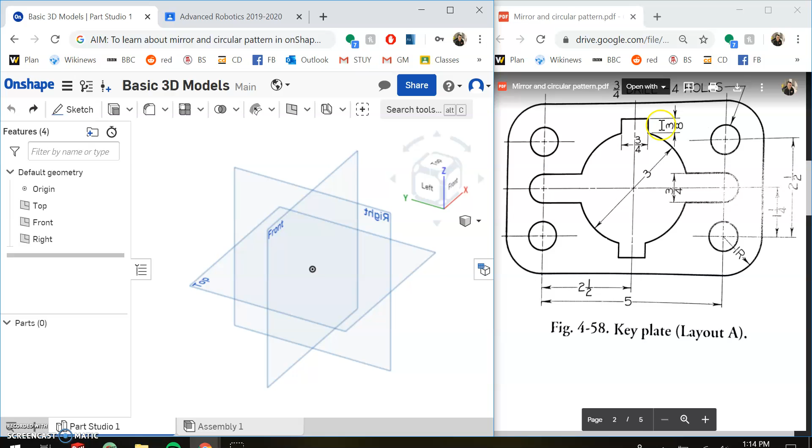Today we're going to go through, I have 2 that I'm going to model for you, and then 3 that I'm going to have you guys do. I want you to go along with me as I'm doing the models and complete those as well.

So let's start with this circular one here. I'm going to start a sketch on the top view. Snap to the top view, and I'm just going to draw 3 circles: my inner circle, my outer circle, and the hole. You might notice that the proportions of these things are totally off.

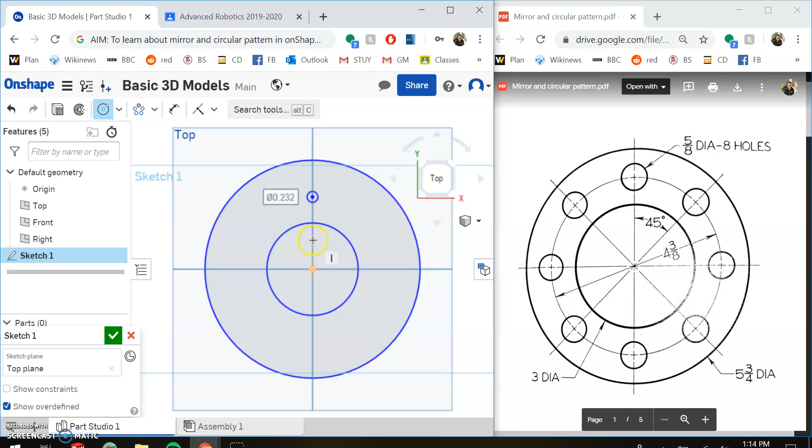This is something I almost always do because I want to make sure I never get confused and accidentally leave an incorrect dimension. So if I drew this hole too close to the correct size, I might just leave it because I didn't realize that it was wrong.

Now that I've drawn these 3, I'm going to dimension this inner one to be 3 inches in diameter. I'm going to dimension the outer one to be 5 3/4 in diameter. Now that I have my inner and outer ones, I can work on this hole here.

I'm not going to dimension this one just yet, even though I normally would, because I want to show you guys something. So I'm going to go to circular pattern, which is up here in my ribbon. If you ever can't find something in your ribbon, you can just type it into this search bar here, or you can hit Alt-C for search, and then type in circular pattern.

You get a preview on the side of kind of what this does. It replicates something in a circular pattern about some center, and then it walks you through the steps of using it. You select the tool, you select the entities to pattern, you specify the number of instances, and so on and so forth.

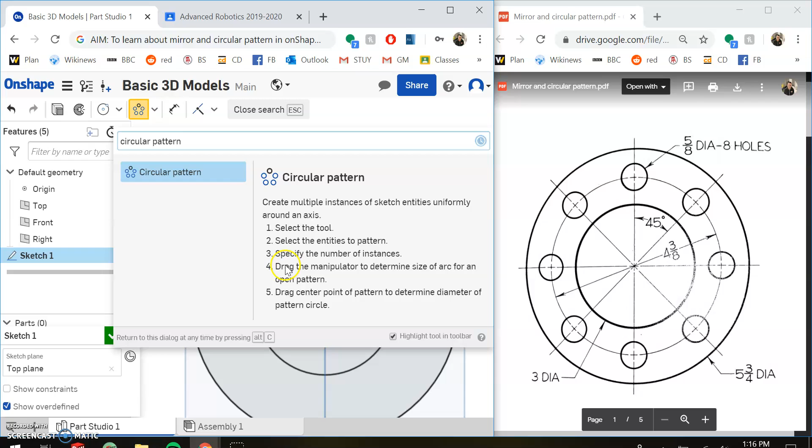So we're going to select circular pattern, we're going to select the circle, and it's going to automatically give us 3. We want 8, so we're going to hit 8, hit enter, and see what that does for us. You can also change the direction if you don't have as many. You can change the angle here, but it looks good to me.

So I'm just going to click again to end that. And then I need to set the dimension of these. The dimension right now is very small. I need it to be 5/8 in diameter.

So I'm going to select that one circle. I'm going to set it to 5/8 in diameter. And you'll see that all of these change with it. By the way I did that dimension, I hit D on my keyboard to dimension and typed in 5 divided by 8, and it changed all of them.

If I need to modify it again in the future, I can make it 1 inch. I can make it whatever I want. 5/8. Okay. And the last thing we need to do is place these circles away from our center the proper distance.

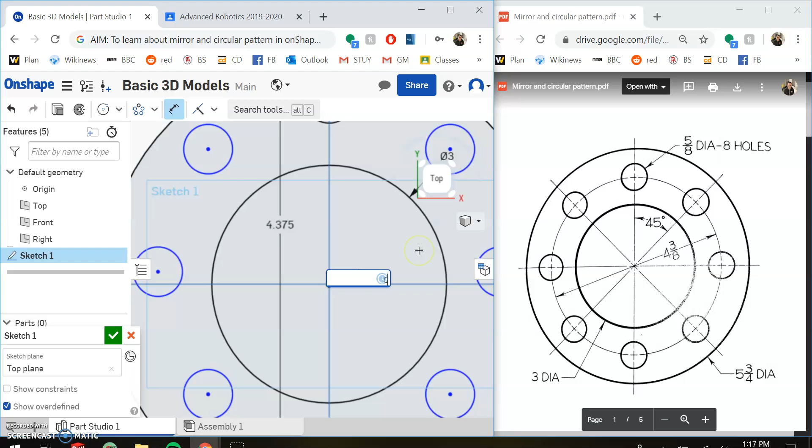So if we look over here, the diameter of this is 4 3/8. So actually what I can do is I can dimension the distance between these two to be 4 plus 3 divided by 8. The center here shifted, so I'm going to select this center, and I'll make that distance 0 so it snaps in position.

This is really nice because if I want to change anything, it just becomes a matter of, I can change that to 2. I can change it back to 4 plus 3 divided by 8. I can make many modifications to this.

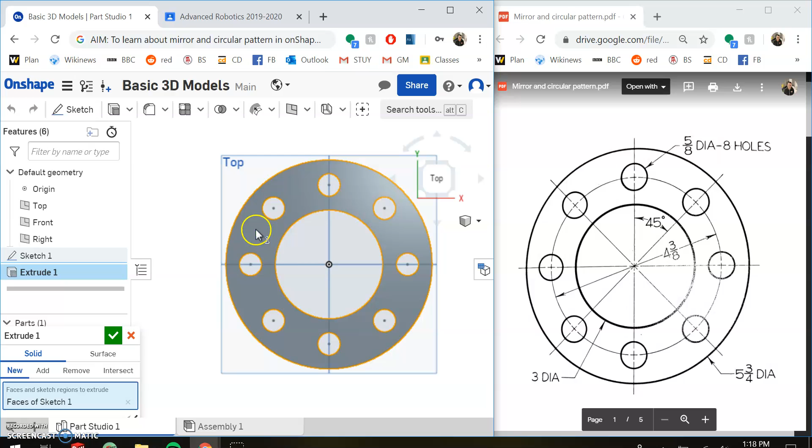Okay, now that I have made my 2D sketch, it's time to extrude, which is up here. You can also hit Shift E for extrude, and it'll auto-select the region. I'll rotate by right-clicking my mouse and moving the screen around.

Let me move this out of the way. Okay, we're going to make this extrude. Let's call it 0.25 inches. And there we go. We've made ourselves a little plate.

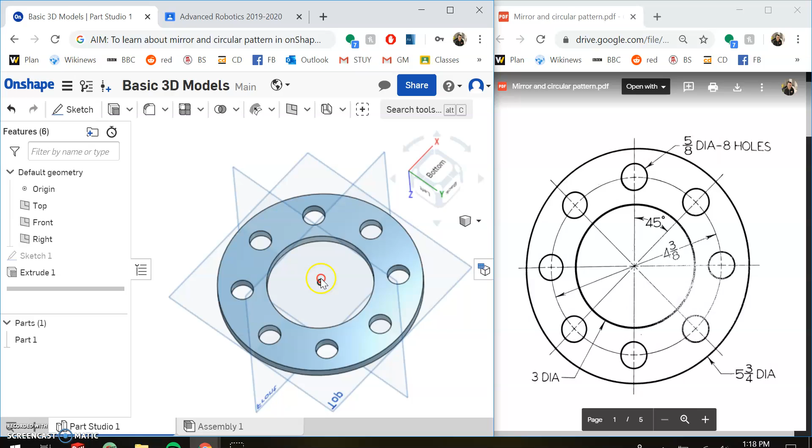That is done. So that's it for this video. In the next video, we're going to go through and talk about mirror and make this second model piece. But just to review what we did here, we used a circular pattern to replicate this hole in 8 spots.

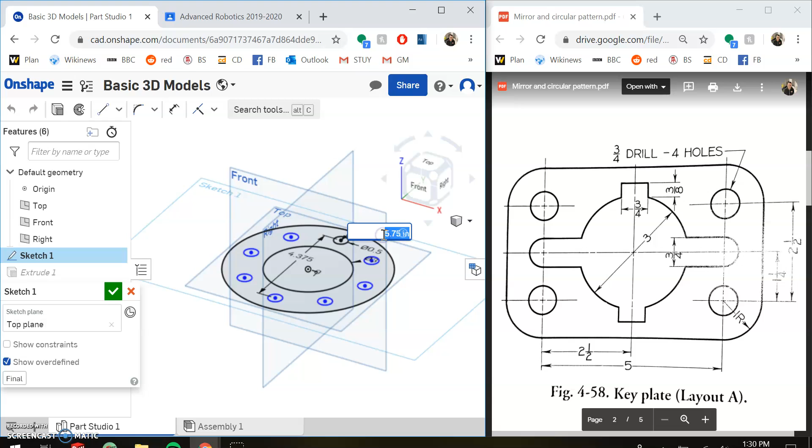This way, I can go back into the sketch if I ever need to modify the size of the hole. Say I want to make it 1/2 inch, and if I exit the sketch, it'll modify the full piece. If I go back into the sketch and I want to modify the size of the outer circle, it'll modify the piece. Press Control Z and go back to what it's supposed to be.

Okay, so that's it for circular pattern. I'll see you for the next video on mirroring.